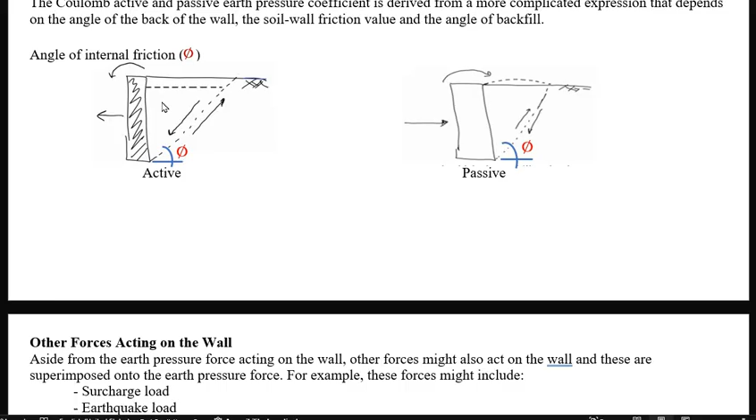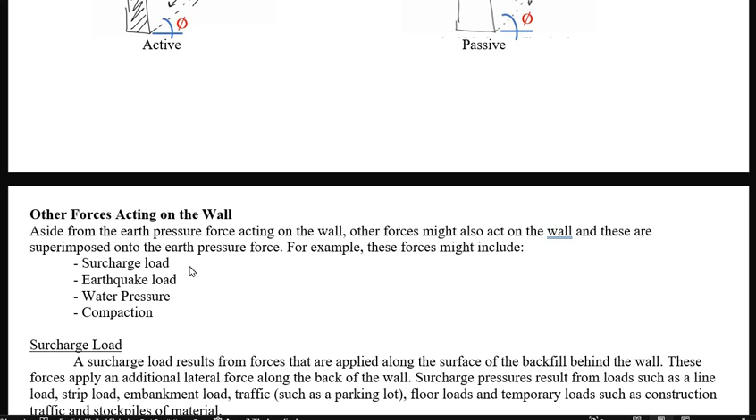Earlier, the load we considered was just the unit weight of the soil, or the self-weight. Aside from the self-weight, there are other forces acting on the wall. These other forces are superimposed onto the earth pressure force, and include surcharge load, earthquake load, water pressure, and compaction.

A surcharge load results from forces applied along the surface of the backfill behind the wall. These forces apply an additional lateral force along the back of the wall. Surcharge pressures result from loads such as a line load, strip load, embankment load, traffic, floor loads, and temporary loads such as construction traffic and stockpiles of materials. An example of that is this Q, which sits on top of the soil.

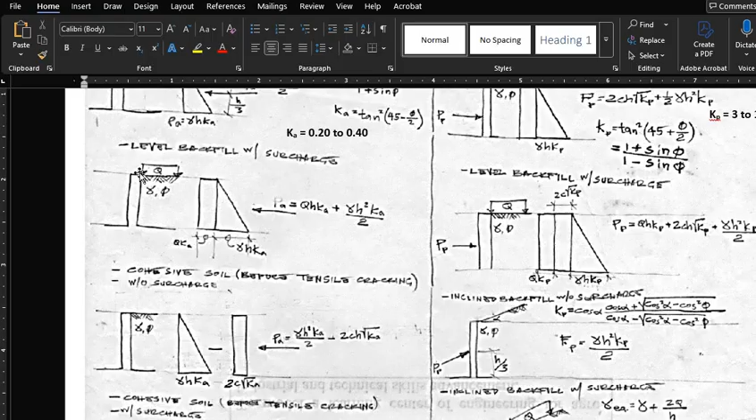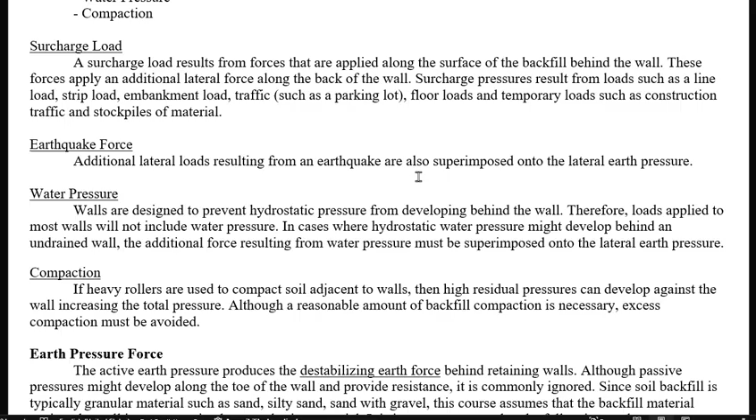And then we have earthquake force. Additional lateral loads resulting from an earthquake are also superimposed onto the lateral earth pressure.

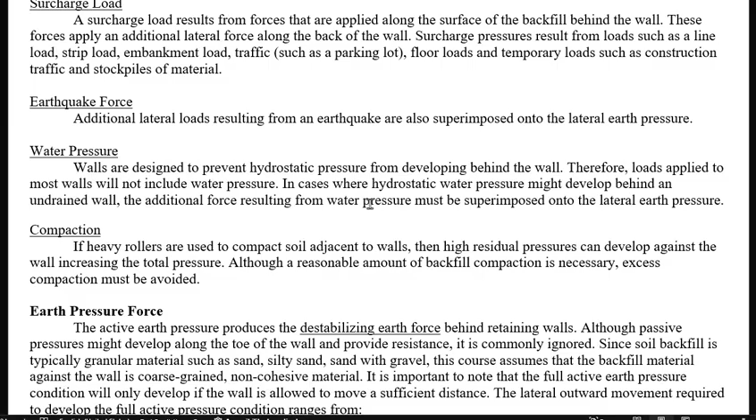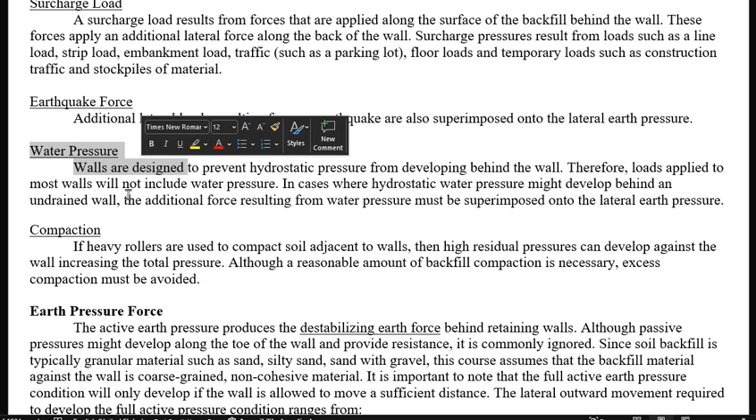And then we have water pressure. Walls are designed to prevent hydrostatic pressure from developing behind the wall. Therefore, loads applied to most walls will not include water pressure. In cases where hydrostatic water pressure might develop behind an undrained wall, the additional force from water pressure must be superimposed onto the lateral earth pressure. This is one reason why there are weep holes, or those holes you see in a retaining wall, to relieve the water pressure.

And then we have compaction. If heavy rollers are used to compact soil adjacent to walls, high residual pressures can develop against the wall, increasing the total pressure. Although a reasonable amount of backfill compaction is necessary, excess compaction must be avoided.

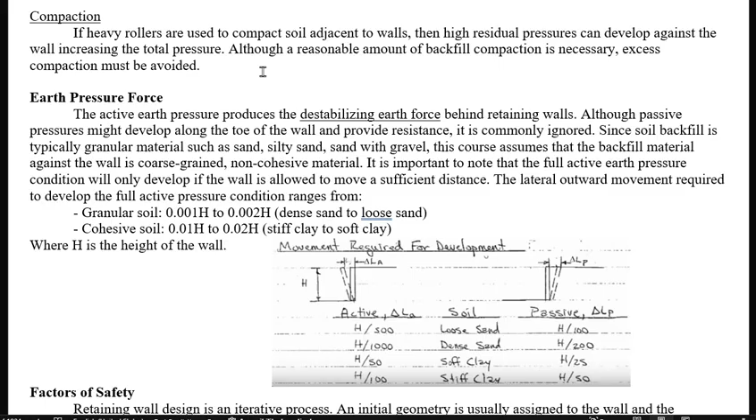For the earth pressure force, the active earth pressure produces the destabilizing earth force behind retaining walls. Although passive pressures might develop along the toe of the wall and provide resistance, it is commonly ignored. Since soil backfill is typically granular material such as sand, silty sand, or sand with gravel, this course assumes the backfill material against the wall is coarse-grained, non-cohesive material.

It is important to note that the full active earth pressure condition will only develop if the wall is allowed to move a sufficient distance. The lateral outward movement required to develop the full active pressure condition ranges from 0.001H to 0.002H for granular soil, that is, dense sand to loose sand.

That's it, H over 1,000 to H over 500. So H over 1,000, that's 0.001H. H over 500, that's 0.002H, or that is dense sand to loose sand. So this dense and loose sand, that's the granular soil.

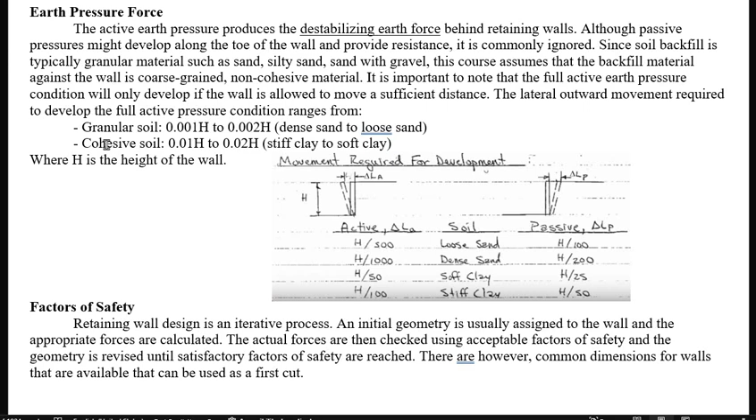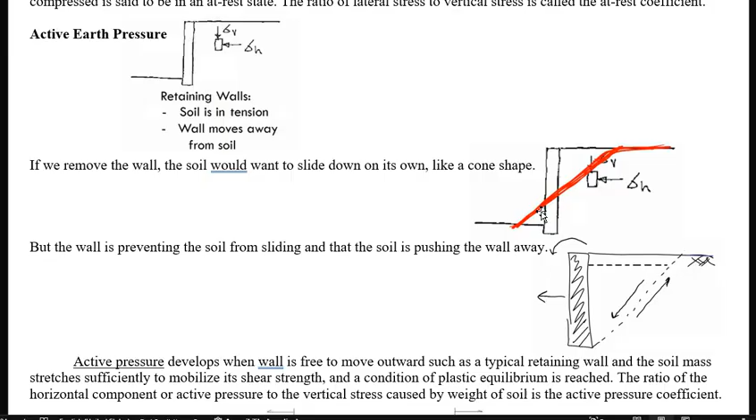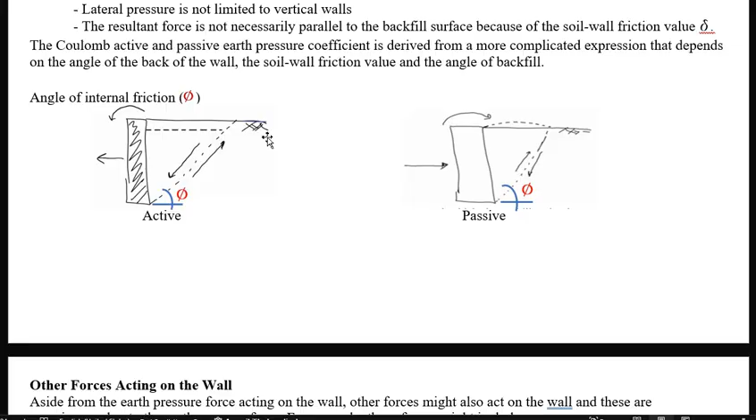For example, with sand, you get a cone shape. But with stiff clay, the cone is almost vertical, meaning they don't easily separate. So in short, for stiff soil like clay, the angle of internal friction, phi, which is the angle the failure plane makes with the horizontal, is high. For stiff clay, this internal friction can reach almost 90 degrees. Meanwhile, for sand, which is granular soil, it's low, the angle of internal friction or the cone shape is small. That's the difference between granular soil and cohesive soil.

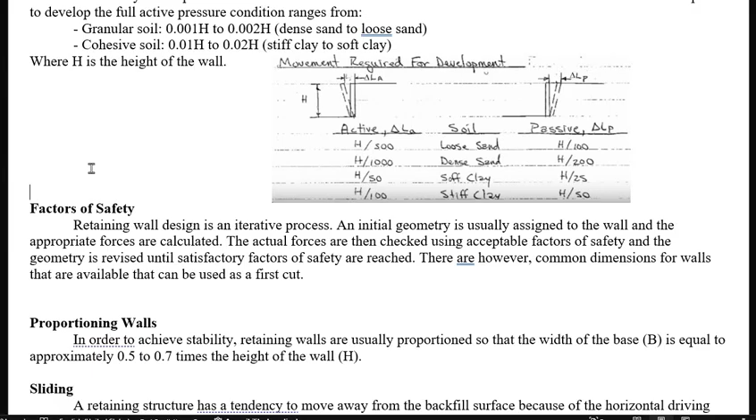So before going to factors of safety, let me show you these soil pressure diagrams.

Earlier, we had these lateral loads. Originally, our loads, referring to active and passive pressure, are dependent on the unit weight of soil, or the self-weight. And included in the self-weight is the cohesion of the soil. Well, in a sense, cohesion is the property of the soil that makes it stick together.

Now, the difference in cohesion: sand has low cohesion, while clay has high cohesion. So sand has a low angle of internal friction, while clay or cohesive soil has a high angle of internal friction. Among the forces shown here, what's not included is external loads such as earthquake.

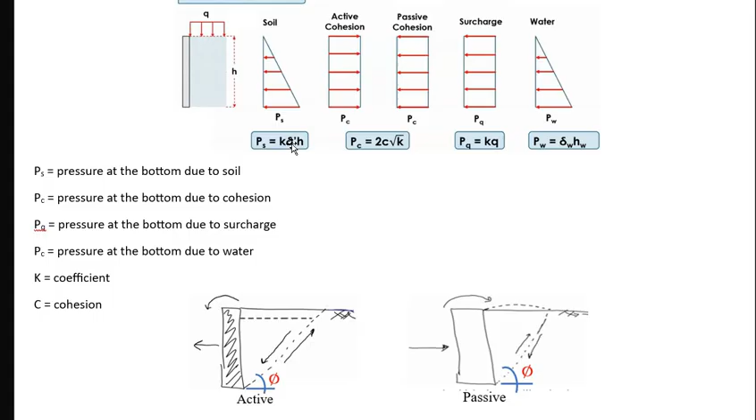Kaya may contribution ang cohesion ng soil sa lateral force. Okay, so ngayon, aside from the soil unit weight, meron na tayong surcharge. Ito, kasama na rin ang water, and then kasama na rin ang cohesion. Ngayon, ang force sa bottom, o pressure at the bottom, is defined by the height of the retaining wall.

Ang pressure diagram due to soil is K times unit weight times H, wherein K is the coefficient of lateral earth pressure. Tapos, due to cohesion naman, P is equal to 2 times C times square root of K. And then, para sa surcharge, P is equal to K times Q. In this case, yung surcharge load, i-convert mo siya ng kanyang equivalent soil load by multiplying it with K. And lastly, yung water, it is equal to unit weight of water times H.

So P sub S, this is pressure at the bottom due to soil. And then P sub C is pressure at the bottom due to cohesion. And then P sub Q is pressure at the bottom due to surcharge. And then P sub W is pressure at the bottom due to water. And finally, your K is your coefficient of lateral earth pressure. Again, ang K, meron siyang active, meron siyang at rest, at meron din siyang passive. And finally, yung C, yan yung constant due to cohesion.

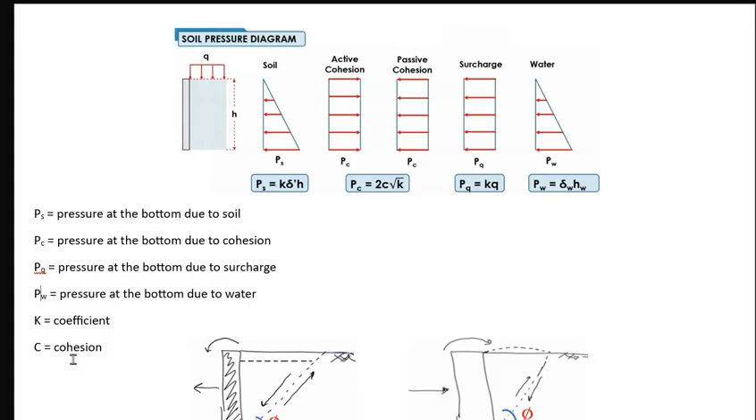Now, going back, pag-usapan na natin ngayon yung pag-design ng retaining wall. Ang retaining wall natin ay made of reinforced concrete, so yun ang ating gagamitin. Mag-apply tayo ng mga factors of safety. So, retaining wall design is an iterative process, ibig sabihin paulit-ulit yan hanggang maging safe lahat. Magpapalit ka ng mga dimensions, magpapalit ka ng properties. So it is an iterative process hanggang pumasa sila lahat.

An initial geometry is usually assigned to the wall and the appropriate forces are calculated. The actual forces are then checked using acceptable factors of safety, and the geometry is revised until satisfactory factors of safety are reached. There are, however, common dimensions for walls that are available that can be used as a first cut.

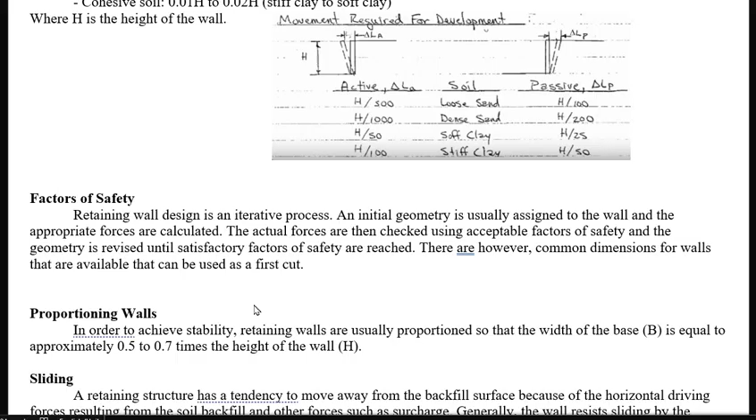Proportioning of walls. In order to achieve stability, retaining walls are usually proportioned so that the width of the base is equal to approximately 0.5 to 0.7 times the height of the wall, or 50 to 70% of the wall. So kapag sinabing stability, may kinalaman dito ang weight nung or mass nung wall.

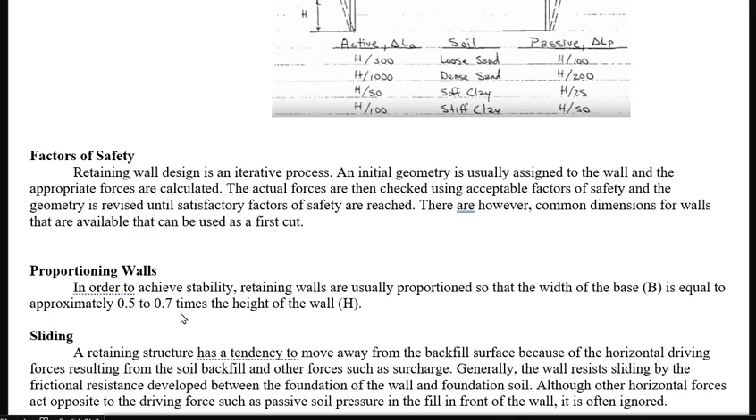And then another is sliding. Since meron tayong lateral earth pressure, kailangan hindi mag-move or mag-slide yung wall. A retaining structure has a tendency to move away from the backfill surface because of the horizontal driving forces resulting from the soil backfill and other forces such as surcharge. Generally, the wall resists sliding by the frictional resistance developed between the foundation of the wall and foundation soil. Although other horizontal forces act opposite to the driving force, such as passive soil pressure in the fill in front of the wall, it is often ignored.

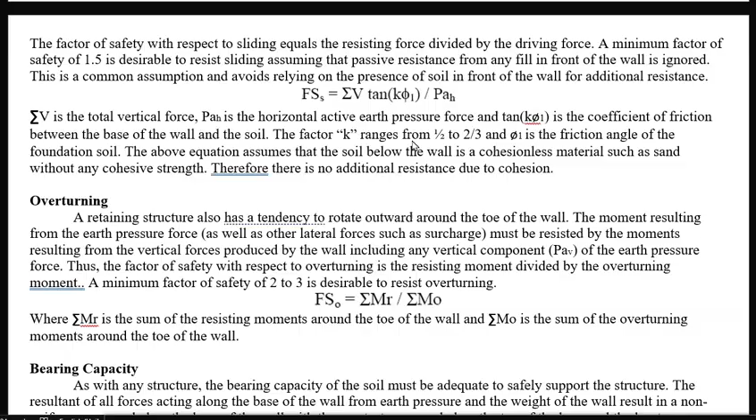Matatakel natin to later on. The factor of safety with respect to sliding equals the resisting force divided by the driving force. So pag-usapan natin itong driving force. Initially, yung driving force, yan yung magtutumba sa wall. So meron tayong soil, meron tayong passive cohesion, meron tayong surcharge, at meron tayong water.

And then yung resisting force naman. Ang resisting force, one would be the weight of the wall itself. Kung malaki yung mass mo ng retaining wall, syempre, hindi siya basta-basta matutumba. Another resisting force is, syempre, etong wall mo, nakabaon yan sa lupa at meron ding tambak dito sa labas. So, yung fill dito sa labas, nag-e-exert din siya ng soil pressure para kontrahin yung driving force.

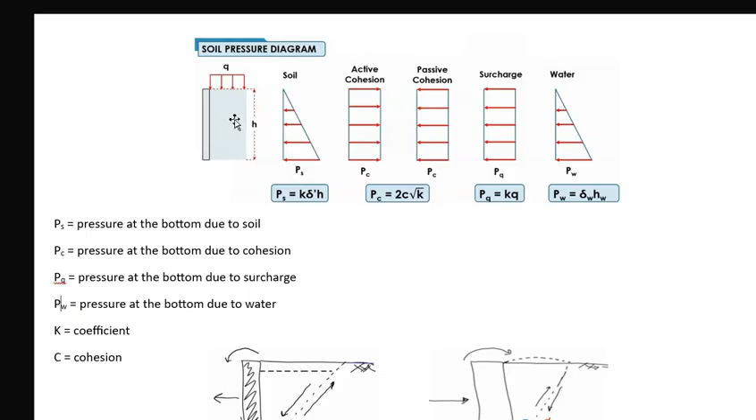So, ibig sabihin nito is, yung resisting force mo divided by the driving force should be 1.5 or more. Ibig sabihin nito, yung resisting force mas malakas ng 50% dun sa driving force. This is a common assumption and avoids relying on the presence of soil in front of the wall for additional resistance. Factor of safety for sliding is summation forces vertical times tangent of K phi1 divided by PAH, or that this is the pressure active horizontal.

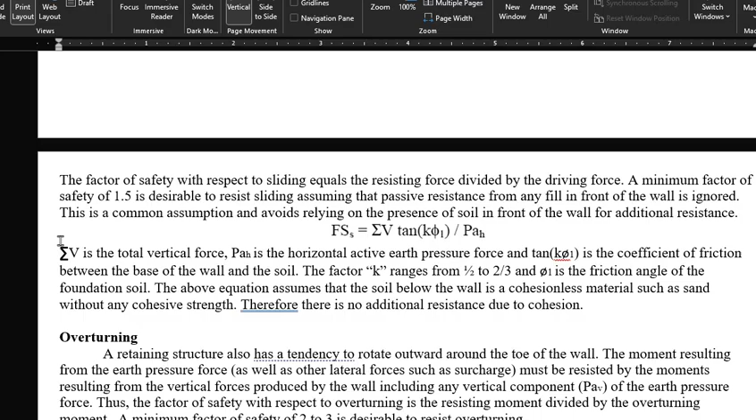Summation V is the total vertical force, PAH is the horizontal active earth pressure force, and tangent K phi1 is the coefficient of friction between the base of the wall and the soil. The factor K ranges from 1/2 to 2/3, and phi1 is the friction angle of the foundation soil. The above equation assumes that the soil below the wall is a cohesionless material such as sand without any cohesive strength. Therefore, there is no additional resistance due to cohesion. So, we will tackle this sa problem solving.

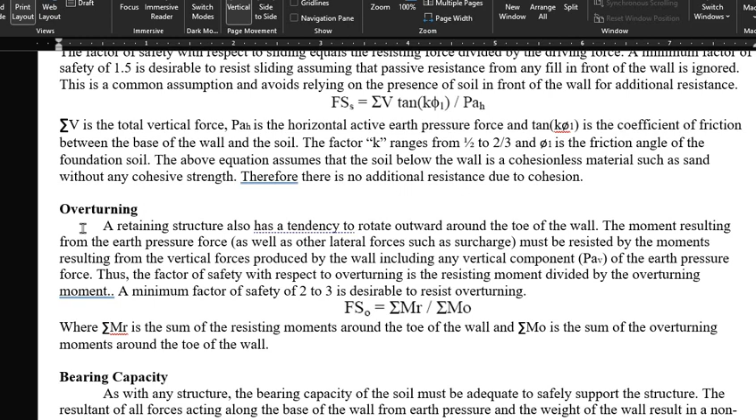And then another to consider in factor of safety is overturning. A retaining structure also has a tendency to rotate outward around the toe of the wall. The moment resulting from the earth pressure force as well as other lateral forces such as surcharge, must be resisted by the moments resulting from the vertical forces produced by the wall, including any vertical component of the earth pressure force.

Thus, the factor of safety with respect to overturning is the resisting moment divided by the overturning moment. A minimum factor of safety of 2 to 3 is desirable to resist overturning moment. So, ito, factor of safety, summation moment resisting all over summation moment overturning. Ngayon, yung overturning moment, yan yung mga magtutumba dun sa retaining wall. Tapos yung moment R or resisting moment, yan yung mga moment due to the forces na magpre-prevent na matumba yung wall. So yung resisting should be 2 to 3 times of the overturning moment.

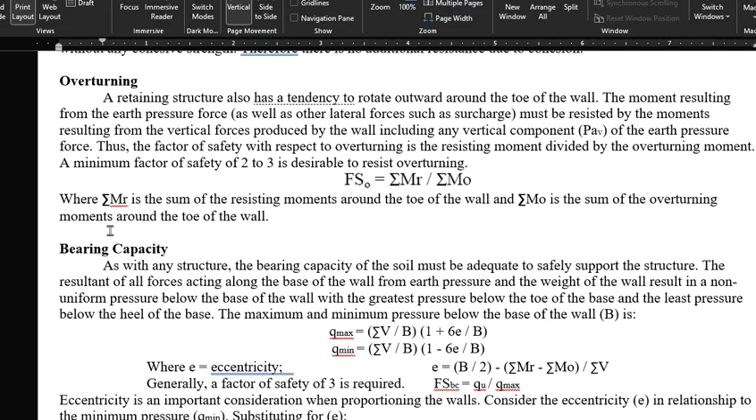And then lastly, we have bearing capacity. As with any structure, the bearing capacity of the soil must be adequate to safely support the structure. The resultant of all forces acting along the base of the wall from earth pressure and the weight of the wall result in a non-uniform pressure below the base of the wall, with the greatest pressure below the toe of the base and the least pressure below the heel of the base. The maximum and minimum pressure below the base of the wall B is this equation, where E is the eccentricity. Generally, a factor of safety of 3 is required.

So yung mga equations na yan, matatakel din natin yan sa sample. So eccentricity is an important consideration when proportioning the walls. Consider the eccentricity in relationship to the minimum pressure Q min, substituting for E, so forth, and so on.

So, dito may kinalaman yung eccentricity at meron ding kinalaman yung zero. Ngayon, itong zero na yan, ibig sabihin yan, yan yung soil pressure na kapag less than zero, ibig sabihin magkakaroon ka ng soil tension or yung footing mo lalabas na. Expressions A and B give acceptable results since pressure at the heel is 0 or greater. Thus, the entire base lies in contact with the soil.

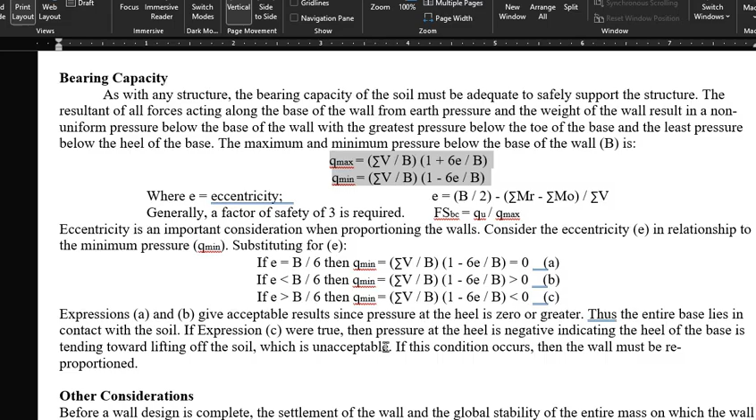Ayan. Ngayon, kapag C less than 0, ibig sabihin yung footing mo tumataas na. If expression C were true, then pressure at the heel is negative, indicating the heel of the base is tending toward lifting off the soil, which is unacceptable. If this condition occurs, then the wall must be reproportioned.

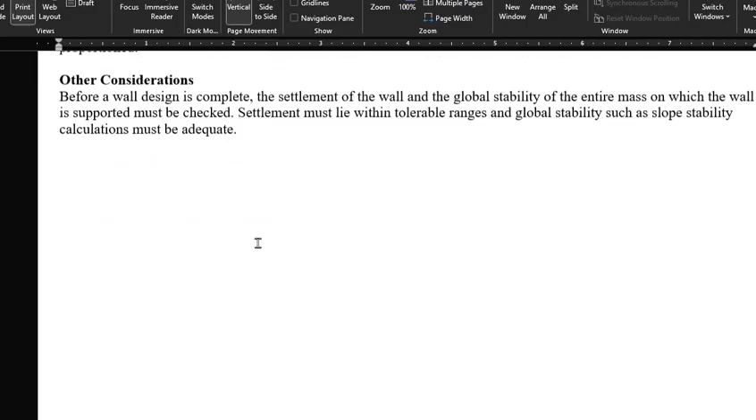And finally, other considerations. Before a wall design is complete, the settlement of the wall and the global stability of the entire mass on which the wall is supported must be checked. Settlement must lie within tolerable ranges, and global stability such as slope stability calculations must be adequate. So, siyempre, wag mong kakalimutan dito yung reinforced concrete design dahil mag-specify ka rin ng mga reinforcing steel bars. And then you also have to check the beam if for shear, for moment, ida-design mo siya as singly reinforced beam.

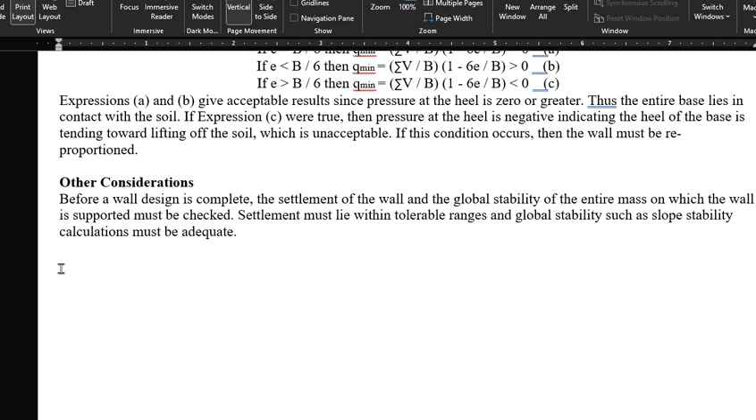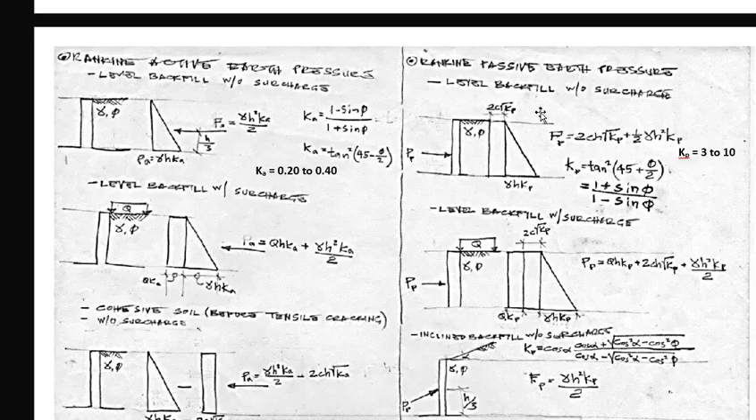Okay, so that ends our lecture on lateral earth pressure. Ang susunod na dito ay yung mga equations regarding Rankine active and Rankine passive earth pressure. Ayan na. So, gagawa na tayo ng mga equations. So, okay guys, thank you for listening.